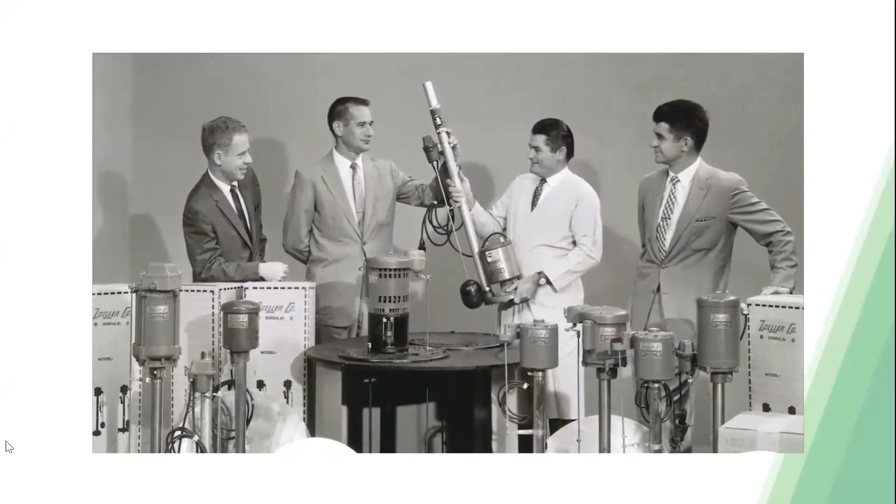During the beginning of the growth, the two arms of the company, manufacturing and sales, were managed by Pop's sons. In the 60s and 70s, the sales arm began to stretch its way across the country, expanding through strong relationships built face to face. Today, people around the world depend on the Zoeller family of companies and their products to move and treat water.

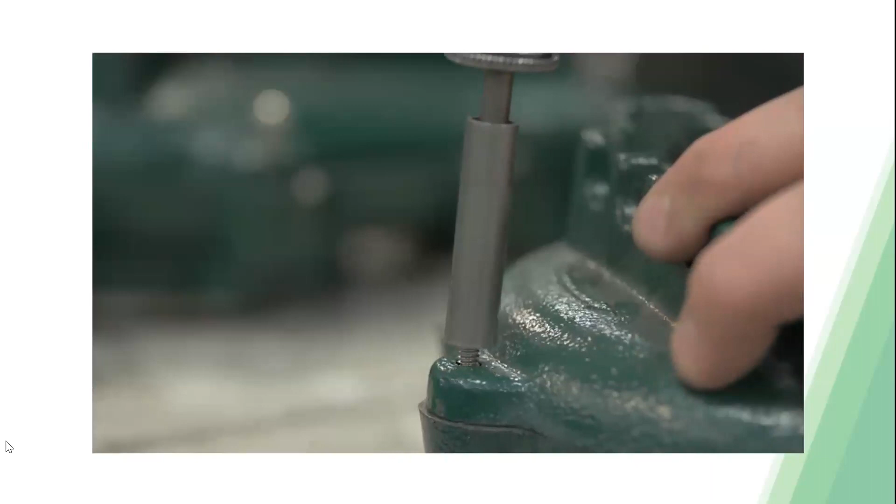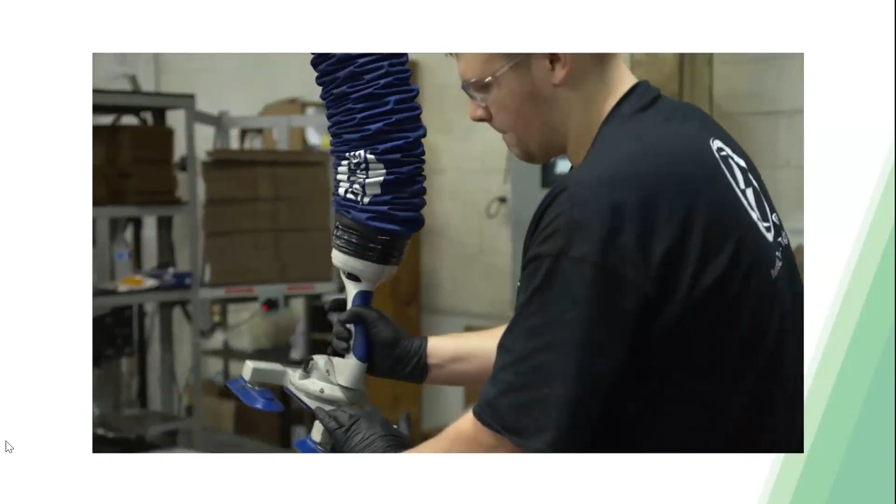But what is it that really sets a Zoeller pump apart from all the rest? Why choose Zoeller? The Zoeller brand is trusted. Zoeller is a family-owned company that has been an established name in the industry for almost 80 years. With a commitment to empower American workers across the country, not only is the Zoeller brand here to stay, but it has never left.

Devoted to the pursuit of excellence and continued improvement, Zoeller supports education and training for current generations involved in the plumbing industry and those to come, with their Center for Excellence training facility. Established in 2015, this hands-on training center is responsible for building and nurturing a reliable network of professionals to meet customer needs.

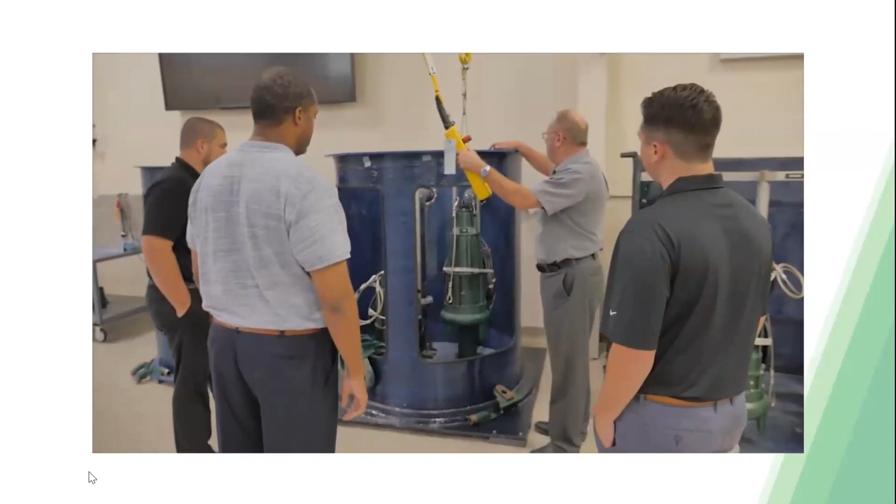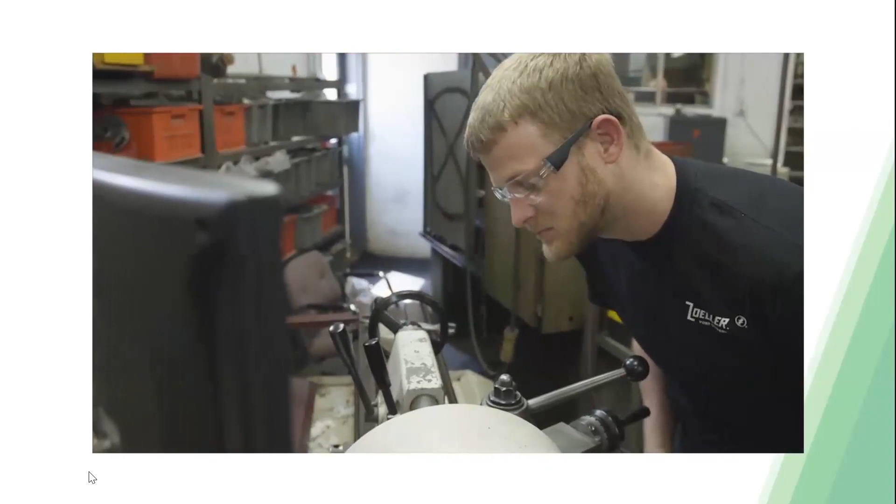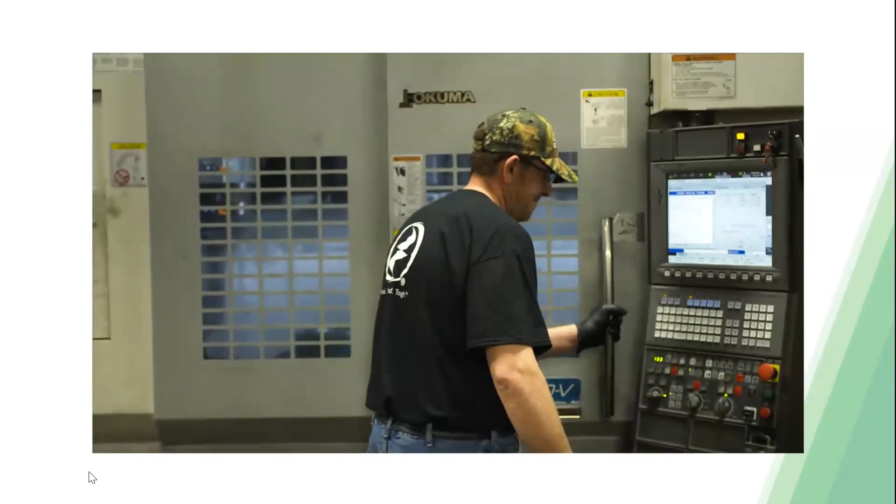All Zoeller products are thoroughly tested. Zoeller pumps are thoroughly tested throughout the manufacturing process, again and again, to ensure all pumps that leave the facility in Louisville, Kentucky can match their published performance before making their way to you. You should have confidence in knowing your Zoeller product will work as it should, when it should, whatever the application, without fuss or headache, to keep your home dry, protected, and operational.

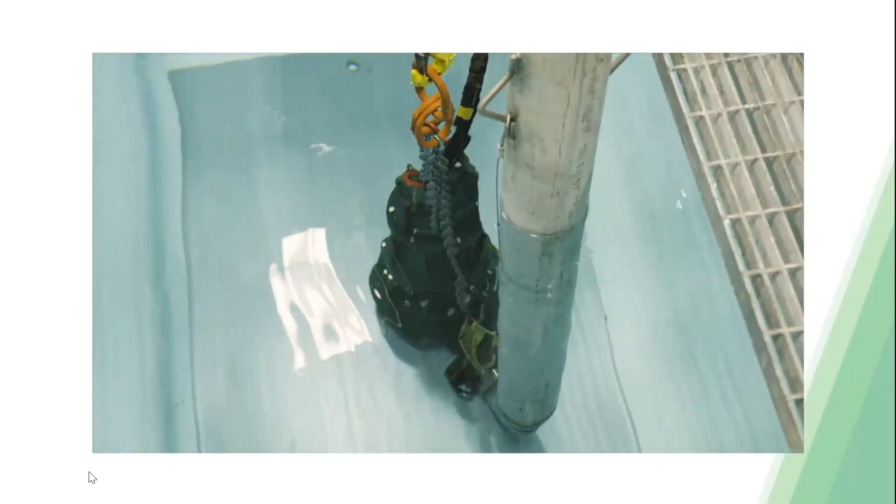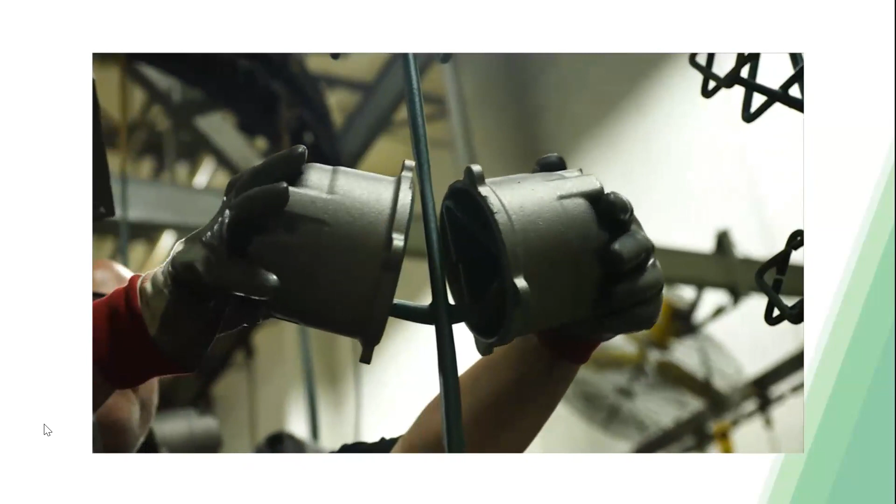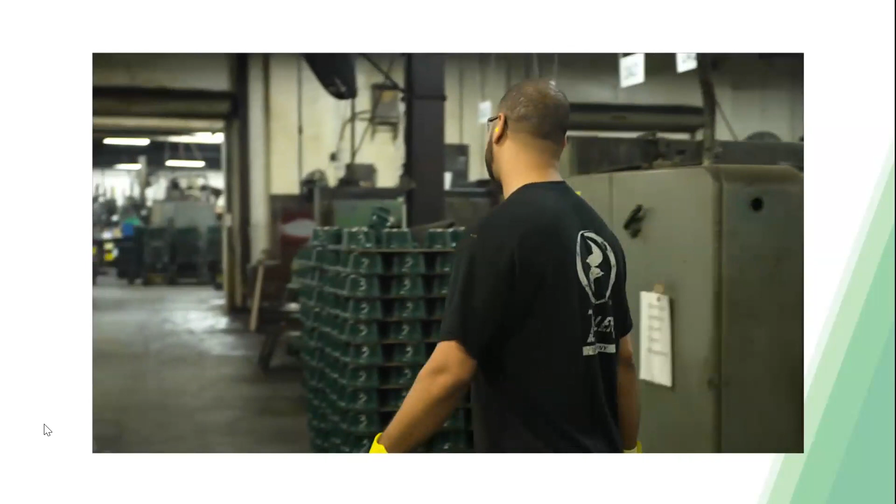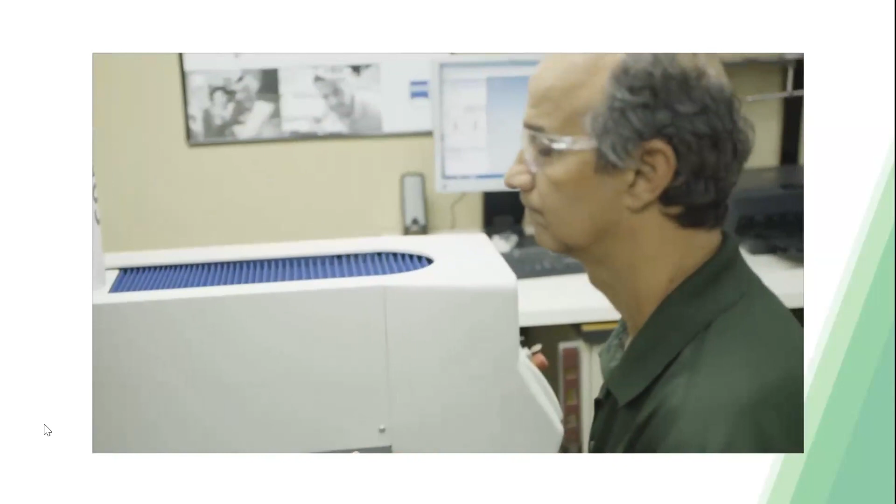Zoeller pumps are tough. These dependable pumps are constructed with heavy-duty cast iron and coated with a powdered epoxy finish to create the strongest and longest-lasting pump on the market. The reserve power design, combined with the industry-proven snap action switch, means your Zoeller pump won't quit when you need it the most. From humble beginnings to a brand known worldwide, Zoeller Company is proud of its dedication to its core values of quality, service, innovation, and integrity. Every product they make, every person they hire, and every relationship they develop is still built upon these standards.

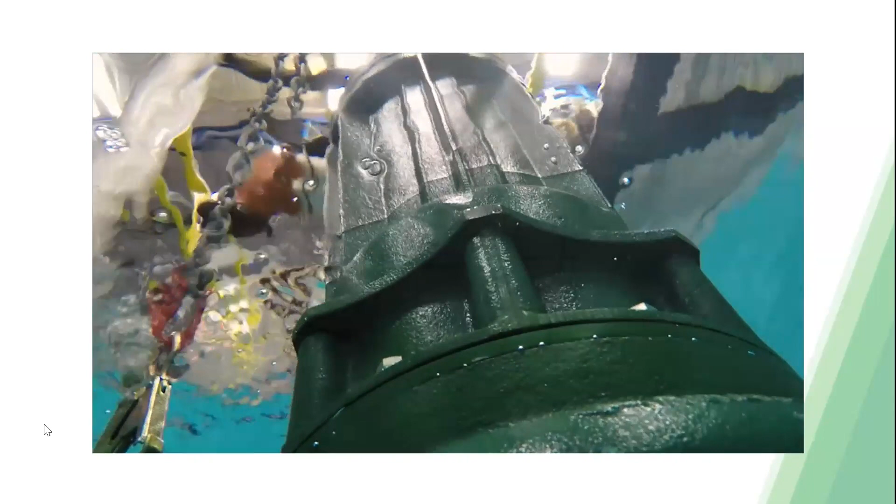So why choose Zoeller? Zoeller pumps are the pumps the pros use. You can't fake over 79 years of experience and expertise. If it doesn't say Zoeller, then it's not a Zoeller pump.

Zoeller Canada was established in 2007 as one of Zoeller's international sales offices. We're located in Brantford, Ontario, and we share a 135,000 square foot facility with Tulsar Controls, which is Zoeller's controls division.

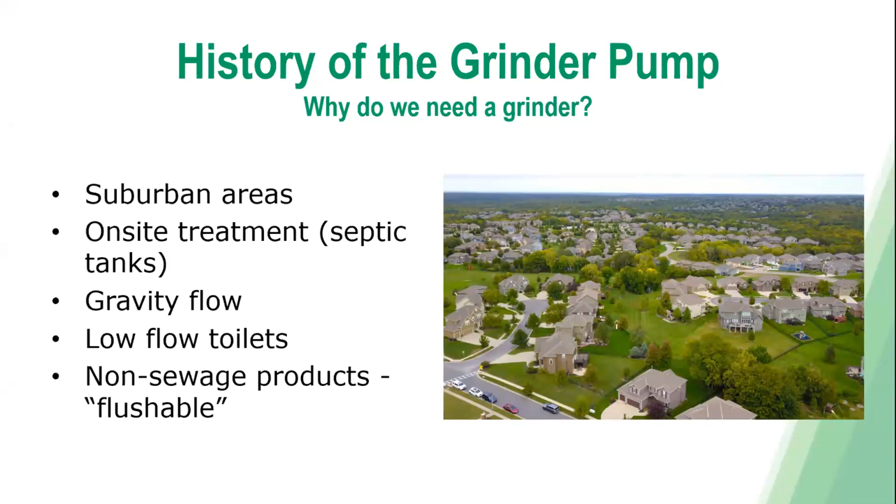I'm going to start off by sharing with you some of the history of grinder pumps. In the 60s and 70s, there was an increased expansion into suburban areas coupled with a need to move sewage further to treatment facilities. Suburban areas are less suitable for on-site treatment, septic tanks, and not all building sites suited for gravity flow. The introduction of low-flow toilets coupled with the same amount of solids and debris proved hard on standard sewage pumps. Also, there was an increased usage of flushable wipes and other non-sewage products being flushed down toilets.

Grinder pumps are designed to operate on small diameter piping, typically 1 1/4 to 3-inch discharge. They help eliminate some of the issues that sewage pumps may encounter. They are typically used in pressure sewer systems or systems with clogging problems. Grinders are not a solids handling pump. Grinders essentially are a 2-stage machine. First, they grind solids to smaller particles and then pump the wastewater to treatment facility or elsewhere. They have high pressure and head capabilities, but lower flows when compared to a standard sewage ejector.

Because of the cutting action and smaller solid size, the tolerance on your impeller can be tighter, which allows you to get that higher head. The reason you get lower flows is because the small opening size on the cutter plate restricts the amount of material that can enter into the pump housing. They're primarily meant for pumping sanitary sewage, and Zoeller is the only manufacturer of a double-sealed reversing grinder pump, and we'll cover some more of that further on in the presentation.

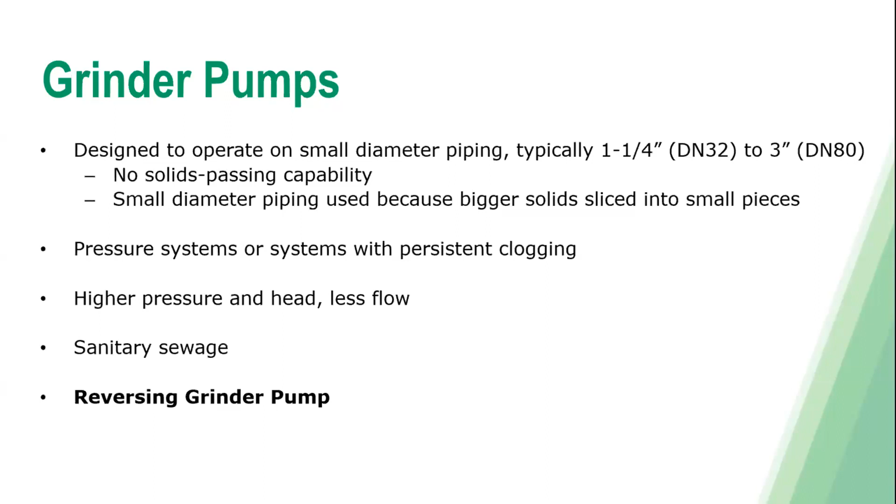All pumps are 100% factory tested before shipping, meaning that each pump before it leaves the facility is submerged in water and tested for its published performance curve before making its way to you. The grinder pump starts at 0.5 horsepower and goes up to 15 horsepower. The offering consists of standard and hazardous duty explosion-proof pumps, unidirectional and reversing. There are both single and double seal models available.

Here are a few standard characteristics of the grinder pumps shared among the series. All of our grinder pumps are constructed of cast iron with a corrosion-resistant powder coating epoxy finish and stainless steel hardware built for years of reliable service. The cutters are axially cutting with scissor-like capability, using a hardened stainless steel cutter and disc. Our grinder pumps use a vortex impeller after the solids are shredded into small pieces. They have an oil-filled, hermetically sealed motor with Class B insulation, automatic reset thermal overload protected, and their maximum operating temperature is 130 degrees Fahrenheit or 54 Celsius.

The cutters: we have the top cutter that is a single directional grinder. The best way to explain the operation of the grinder cutter is it kind of acts like a cheese grater without the rotation. With proven tri-slice cutter technology, we have 3 independent cutting channels that provide over 250,000 cuts per minute. The stainless steel cutter and plate have a 55-60C hardness. Essentially, with the cutter mechanism, it grinds the solids down to smaller particles of 1/4 inch or less, usually utilizing a scissor action and the cheese grater type plate with its small holes. The particles then get pushed to the vortex impeller and then pumped through the unit.

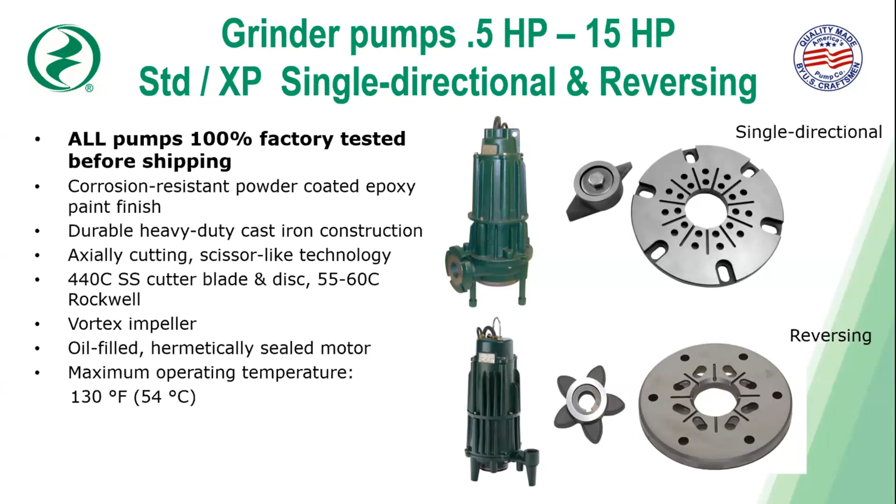The lower picture shows the reversing grinder with its cutter. The cutter can automatically alternate direction upon each new cycle to enhance blade life and free hangups. The 5-star cutter blade, along with the modified cutter plate, enable the pump to cut in both directions.

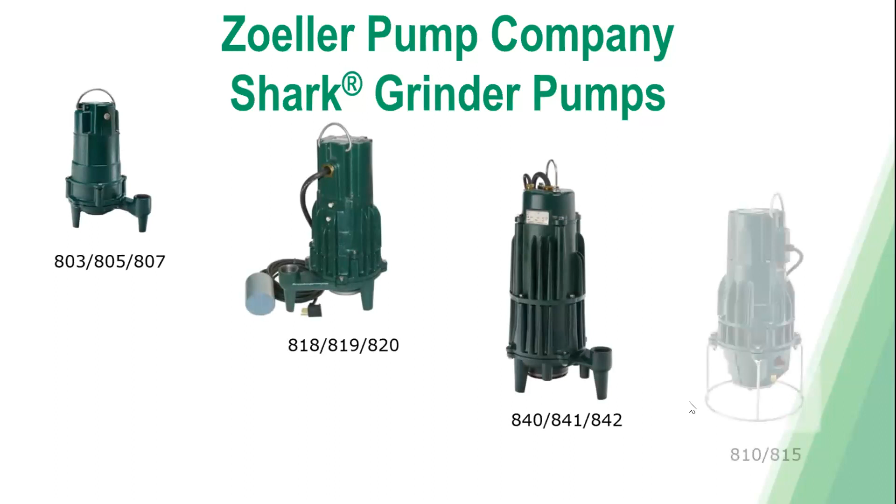Grinder pump models under the Zoeller brand offer units recommended for lighter residential and commercial applications up to 2 horsepower max. These include the 803, 805, 807 fractional horsepower series, the 818, 819, 820 series, the 841, 842, and 840 reversing grinder, and finally the 810 and 815 progressive cavity units.

These fractional horsepower grinders can handle an entire household of flushable materials. There are 3 sizes available: automatic and non-automatic, 115 volt or 230 volt single phase only at 3450 RPM. Half horsepower model 803, 3/4 horsepower model 805, and then the 1 horsepower model, which is the 807.

These units have auto reset thermal overload protection, internal capacitor and start relay, carbon ceramic single mechanical seal design, and a 1 1/4 inch vertical discharge.

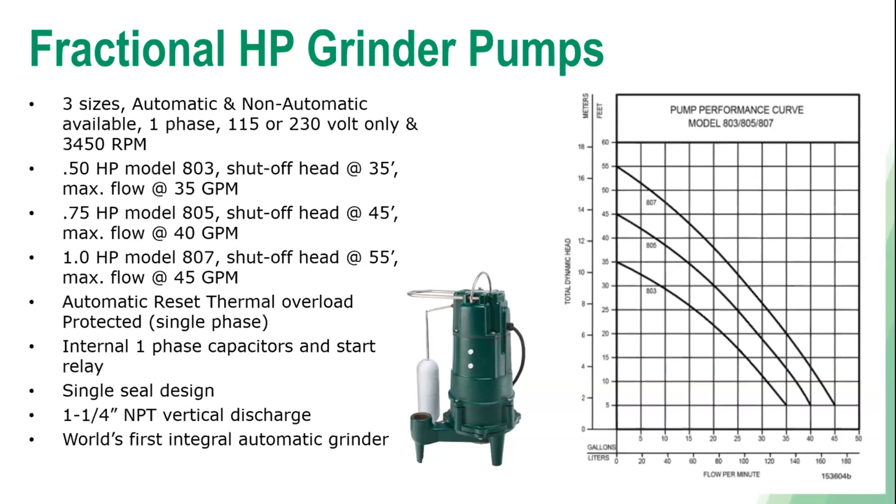Zoeller has the first integral automatic grinder, used in the 915 systems, package complete and job ready, great for fast installations, indoor or outdoor applications. 915 package systems come in 2 different sizes: 18 by 30 fiberglass or poly, 24 by 24 in poly only, with high water alarm and 1 1/4 inch check valve with union.

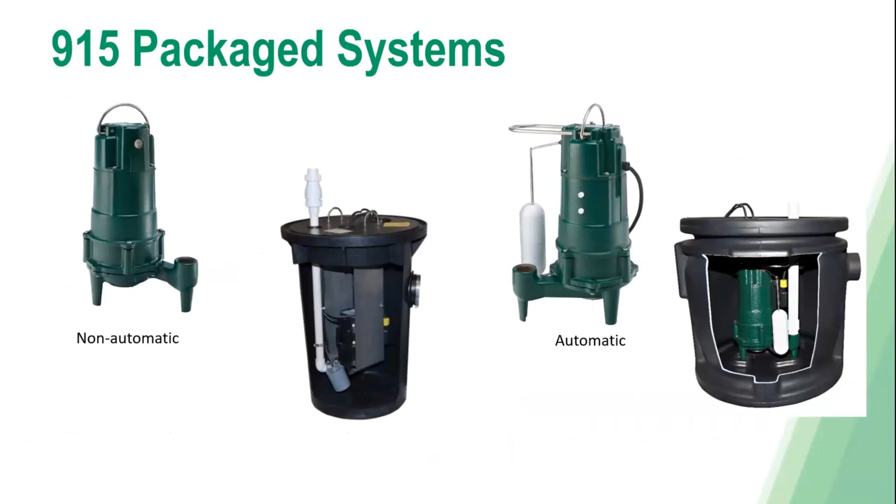And if I can just pause you there. Yeah, I know one thing that's come up frequently over the years working with Zoeller here, is that those 915 series is certainly a model number to keep in mind for anyone on the call. For any of your retrofit applications, those have been lifesavers. Those challenges you get into during a design where you're stuck in a basement and you've got to send something up, if it's not designed around it, these fit into such a small footprint that they've been really lifesavers for a number of projects. So a good model to keep in mind there.

This Shark 818, 819, and 820 series of grinders are engineered for heavier residential applications and pressure sewer systems. Model 818 is 1 horsepower, 819 is 1.5, and 820 is 2 horsepower. Not automatic or automatic models with integral control available.

Both durable, heavy-duty, thin cast iron construction and thermally protected oil-filled motor allow the pump to run cooler. Upper and lower ball bearings, stainless steel cutter blade and plate, stainless steel shaft with stainless steel hardware, 20-foot power cord, extra lengths are also available.

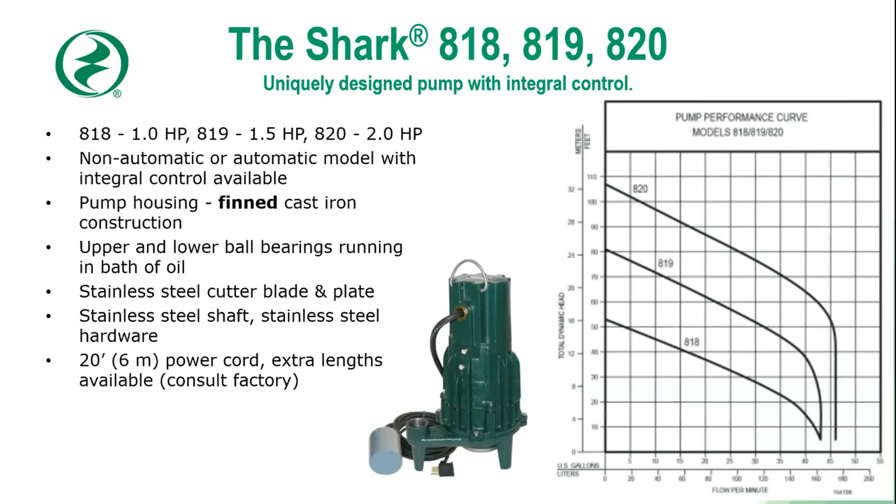Zoeller offers the industry's only automatic reversing impeller and cutter assembly, which virtually doubles the service life of ordinary grinder pumps. Every time the pump operates, it will reverse direction. The panel shall incorporate the automatic reversing function, which enables the cutter blades and impeller to rotate in either the clockwise or counterclockwise direction.

With each duty cycle, the cutters will rotate in the opposite direction from the previous operational cycle. So just a quick question there, because it's come up many times over the years as we introduced that Shark 840. If you want to go back to that last slide really quickly, could you explain why the reversing grinder matters? Like, the statement's always, if the plan is for the grinder to chew up the material, why does it matter if it reverses?

Right, so lots of times you'll see it actually on our YouTube channel as well. Let's say if there's jeans going into it, it'll grind in one direction, and chances are that jeans will not go through on that single direction. So then it'll reverse it, and instead of getting jammed, it reverses it and can cut through the rest of the jeans. That's one thing. Now the other thing is also for longer life, so if you have wipes and stuff going into it, it'll go in two different directions. So you're increasing the lifespan as well. Great, thank you.

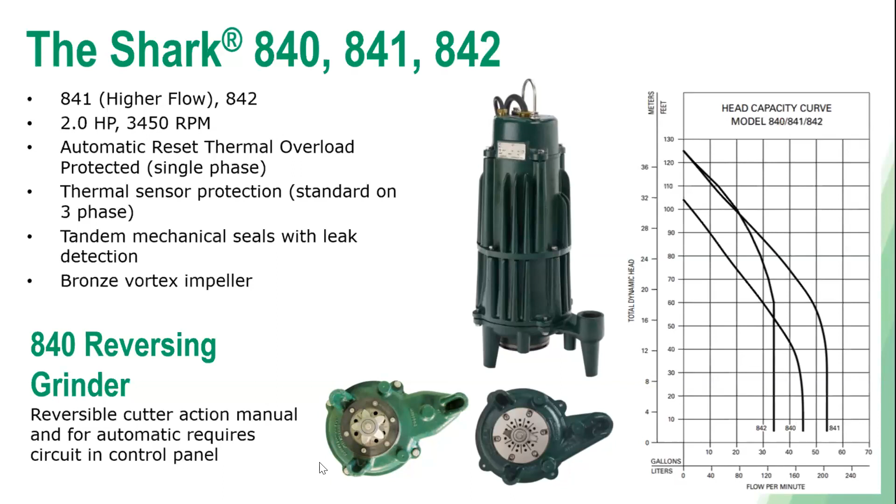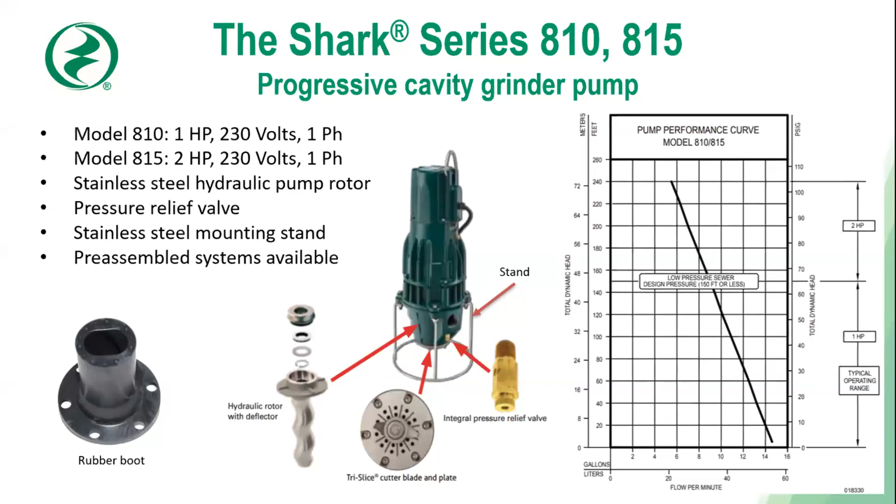The model 810 is a 1 horsepower, 230 volt unit. The 815 is a 2 horsepower, 230 volt, both in single phase. Features include a stainless steel hydraulic pump rotor, pressure relief valve, stainless steel mounting stand for freestanding installation, and pre-assembled systems are also available.

Grinder pump models under the ZEP brand are engineered for heavy-duty wastewater applications with a number of options: upgraded mechanical seals and elastomers, moisture and temperature sensors, horizontal flange and impeller trims.

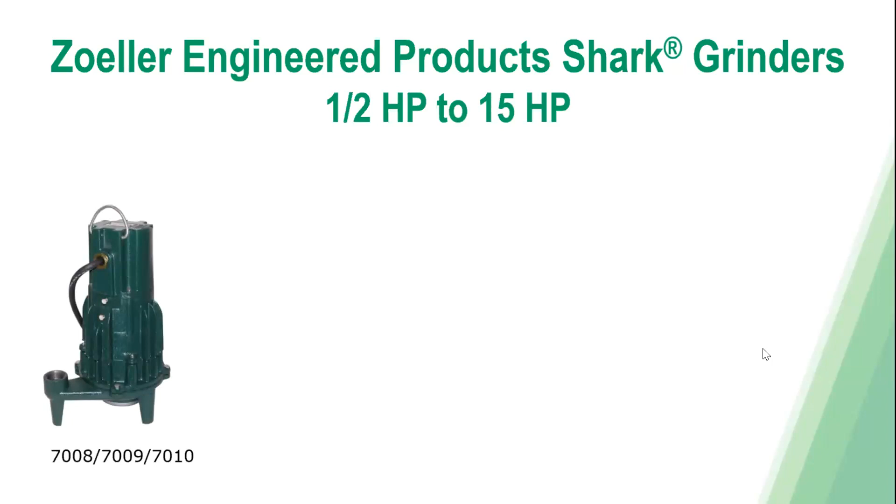Models include the 7008, 7009, and 7010; 7011, 7012, and 7013; 7110, 7111, and 7112; and finally the 7020 and 7021 progressive cavity units. These units have similar characteristics and performance to the Zoeller pump brand 818, 819, and 820.

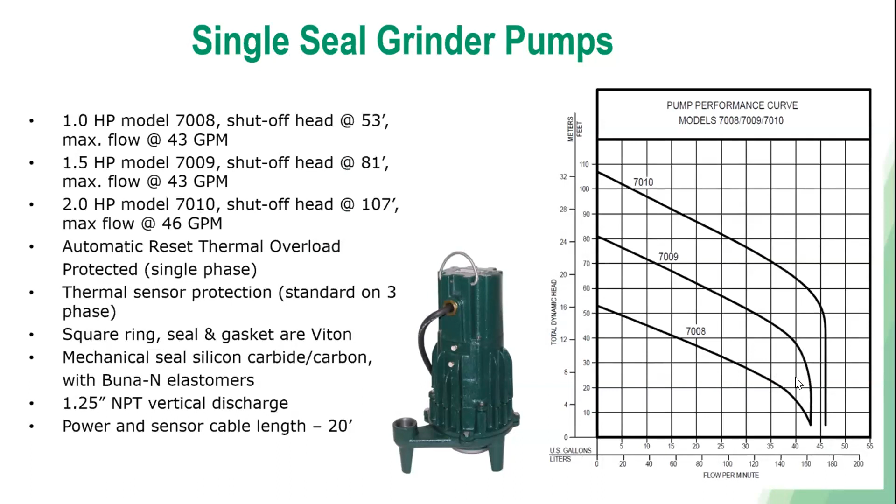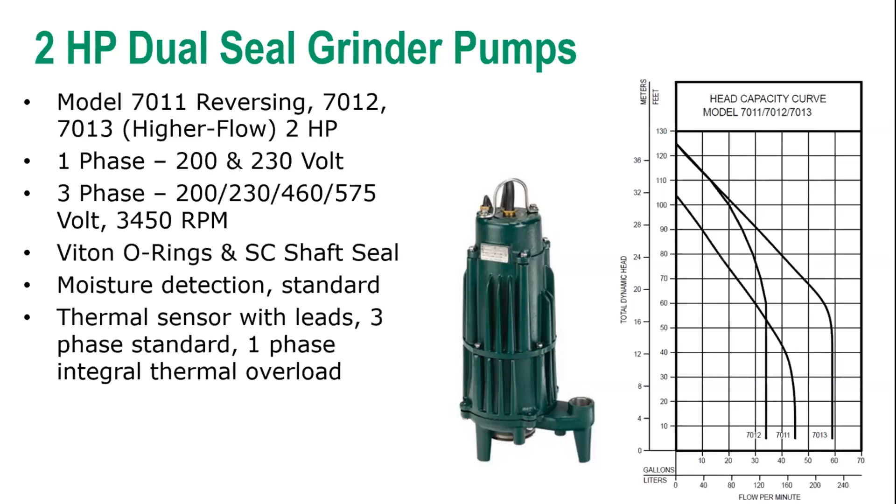3-phase, 200, 230, 460, 575 volt, 3450 RPM, Viton O-rings and silicon carbide shaft seal, moisture detection standard, thermal sensor with leads for 3-phase, and standard single-phase integral thermal overload.

Now we're going into bigger units, higher head applications and higher flow, 30 different variations, standard and hazardous duty. Applications where these pumps will be suited for are sewage lift stations, housing developments, essentially municipal projects, large commercial projects, and low pressure sewer systems that have high vertical lift or long force mains.

Pump characteristics: 2-inch NPT, 2.5 and 3-inch flange discharge, high head, high flow and reversing capabilities. Single phase 230 volt in the 3 and 5 horsepower only, 3-phase 200, 230, 460 and 575 volt, 3450 RPM. Thermal sensor and moisture sensor with leads, ball bearings, upper and lower carbon chromium steel bearings. Power sensor cable is 25 feet.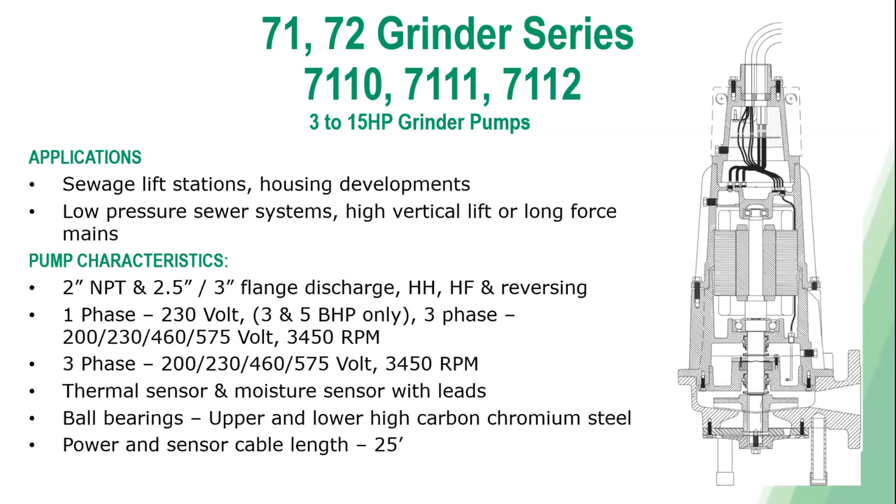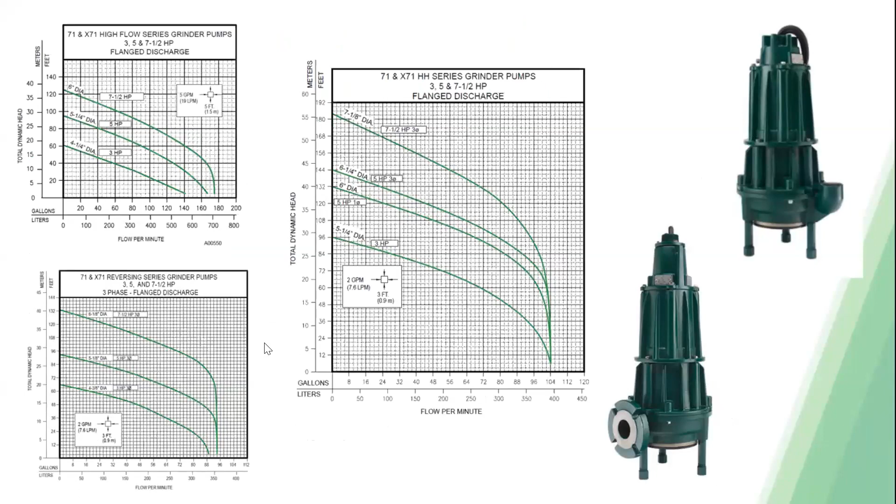As you can see here, the 71 series grinder pump has a max shutoff head of 183 feet. This is the capability of these units based on the higher horsepower and larger discharge. You'll also notice that in this 71 series, you can go from 3 horsepower to 7.5 horsepower as far as the reversing grinder goes.

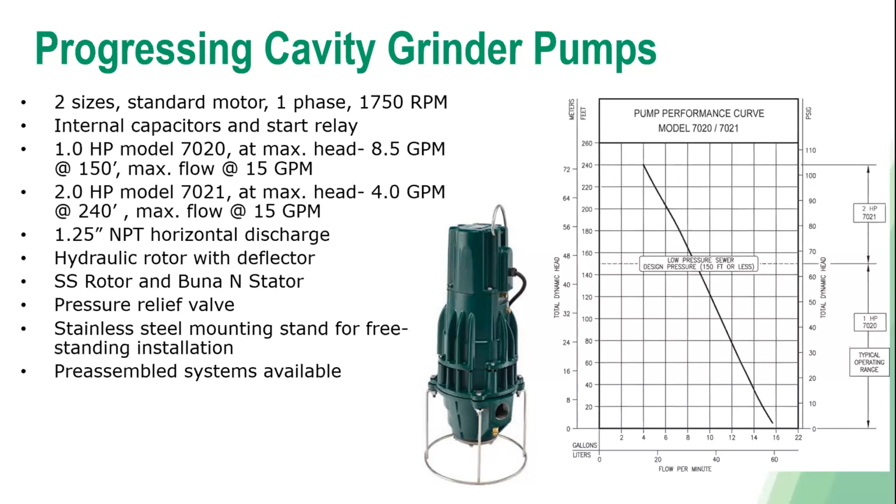Applications include sanitary sewage pumping stations, pressure sewer systems, housing developments, hospitals, larger private developments, and commercial projects. Two sizes, standard motor, single phase, 1750 RPM, internal capacitors and start relay: 1 horsepower model 7020, 2 horsepower 7021. 1.25 NPT horizontal discharge, hydraulic rotor with deflector, stainless steel rotor, Buna N stator, pressure relief valve, stainless steel mounting stands for freestanding installations, and pre-assembled systems also available.

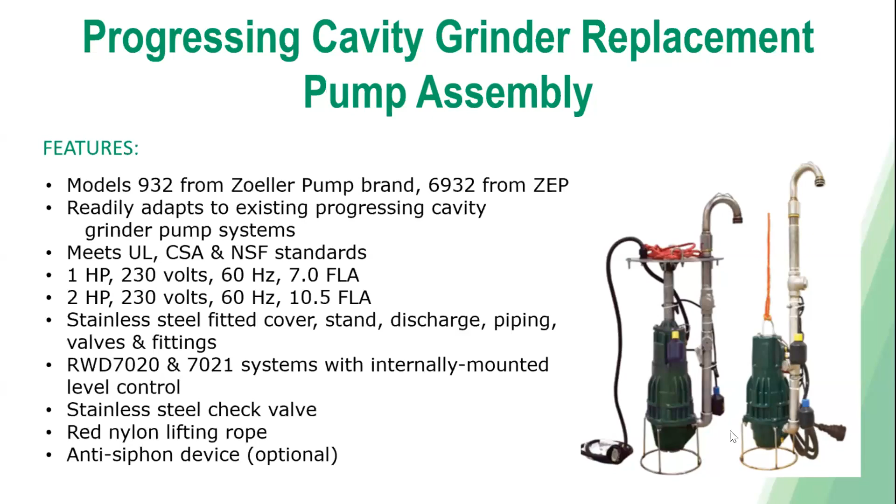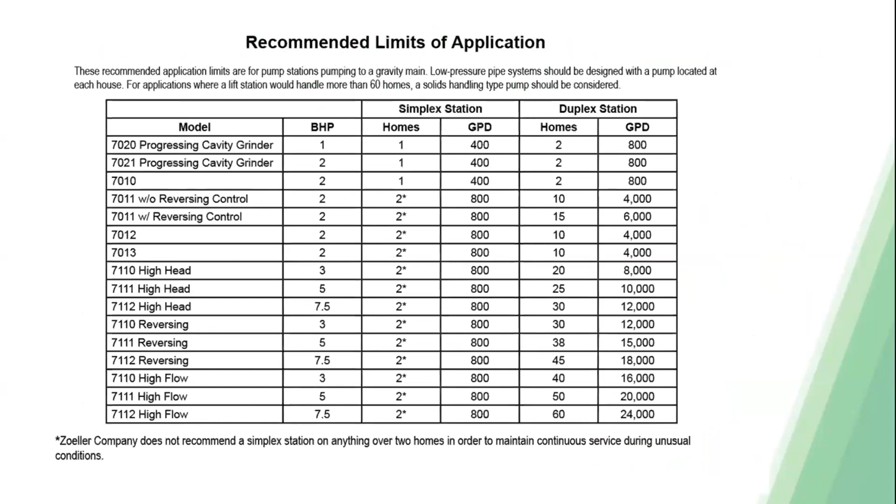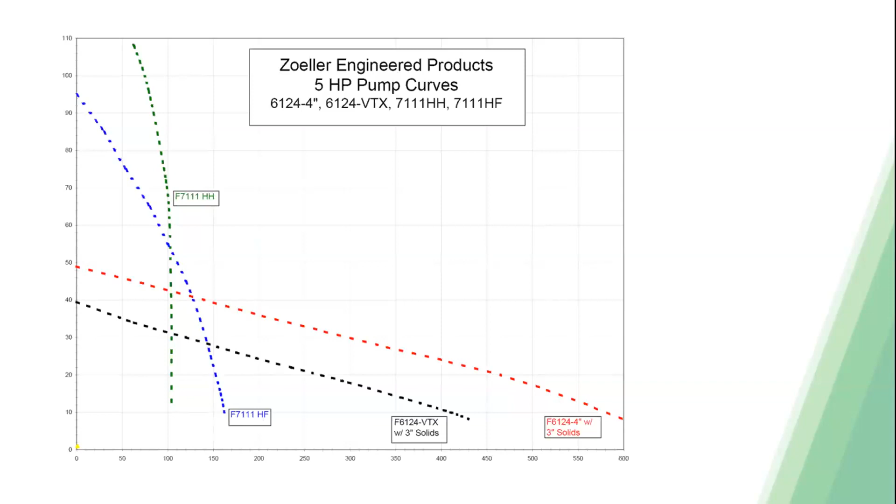Here we have some curves showing the difference between the 7111 high head grinders with low flow to the 6124 solids handling pumps that can offer greater flow. It's a matter of understanding the system requirement and putting the right pump in the right application.

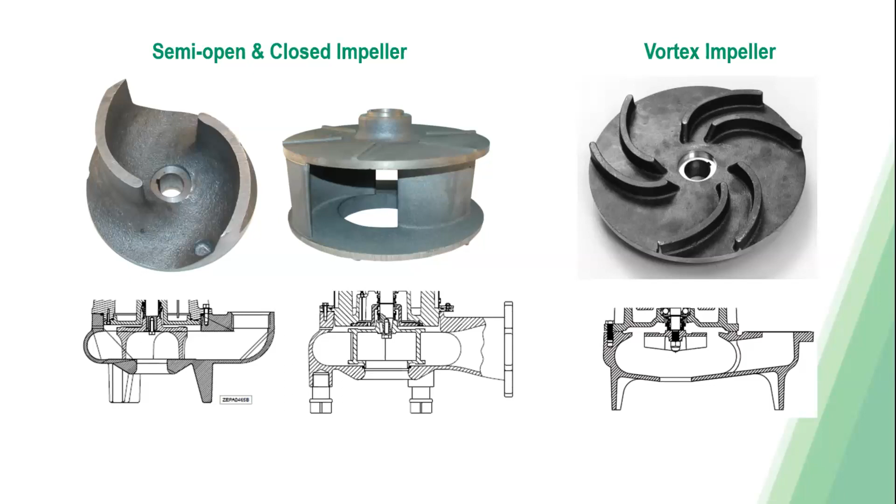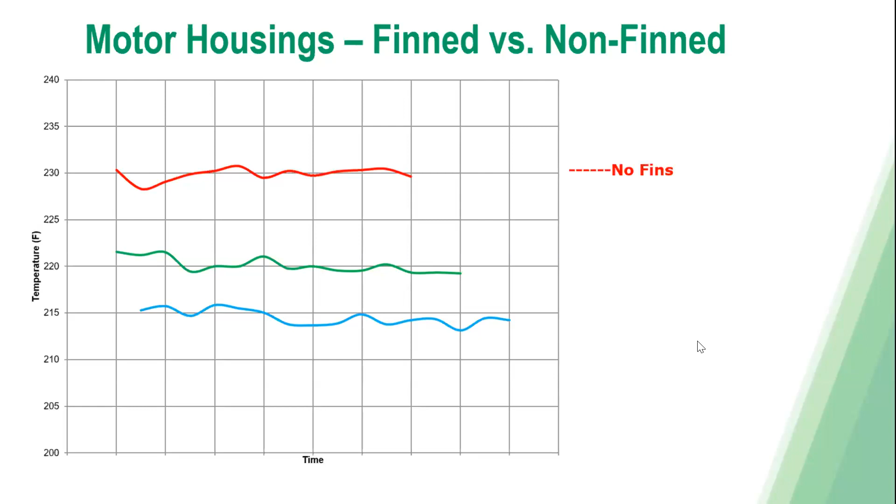A hazardous duty or explosion-proof rated pump has a specially enclosed motor. Should vapor or gas explode inside the motor, the frame of the motor will not be affected. The enclosure is constructed so that no such explosion will ignite vapors outside the motor.

Zoeller explosion-proof pumps are cCSAus approved, Class 1, Division 1, Group C and D. The Zoeller pump brand of explosion-proof pumps is only available in the 840, 841, and 842 series, while the ZEP brand starts from the 7011 series up.

Applications include garages, storm sumps, municipal sewage, leachate, elevators, government projects, offices, healthcare, airports, petroleum facilities, train and auto applications, and grain elevators.

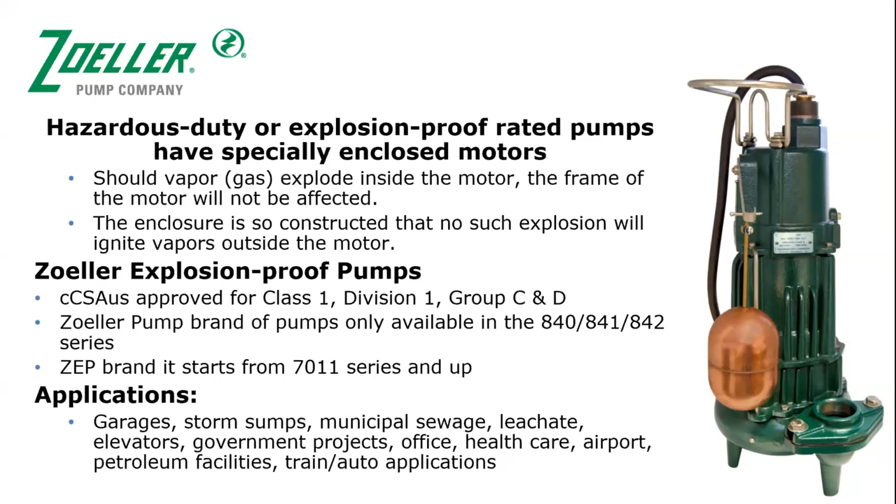After figuring out which pump you need for your application, you now have to choose how you are going to control it. If it's not just a standard pump with an integral float switch or a piggyback float switch, you have to consider control panels, simplex with 3 floats or duplex with 4 floats.

The pump assembly can be easily lowered into position without disturbing the piping by using a Z-rail disconnect system, which assists in removal of the pump out of the concrete, fiberglass, or steel pit.

Then you consider accessories like check valves, cast iron, PVC, plug valves with handles, etc. Lastly, you might require an external high water alarm, or if you have an integral float switch or are using a piggyback float, the high water alarm is a great option.

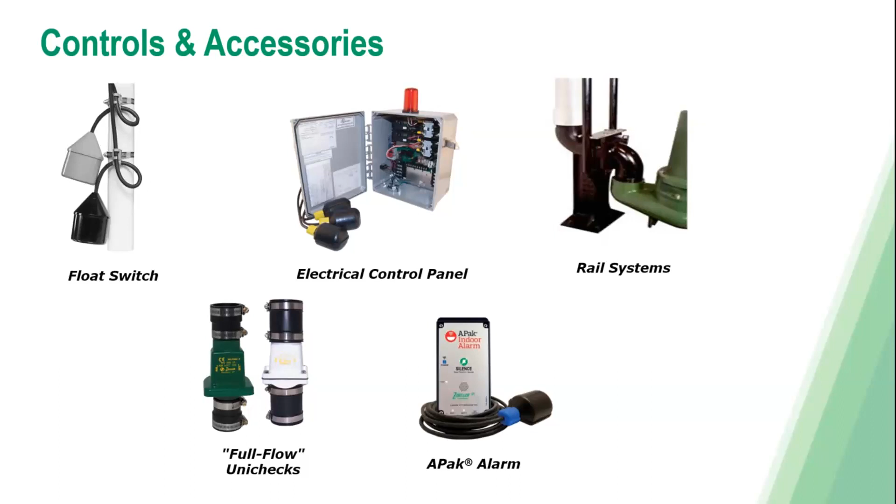Complete grinder package systems are factory assembled for quicker, easier installation at the job site. We can also provide unassembled systems, where pumps and accessories come as separate items, with less piping.

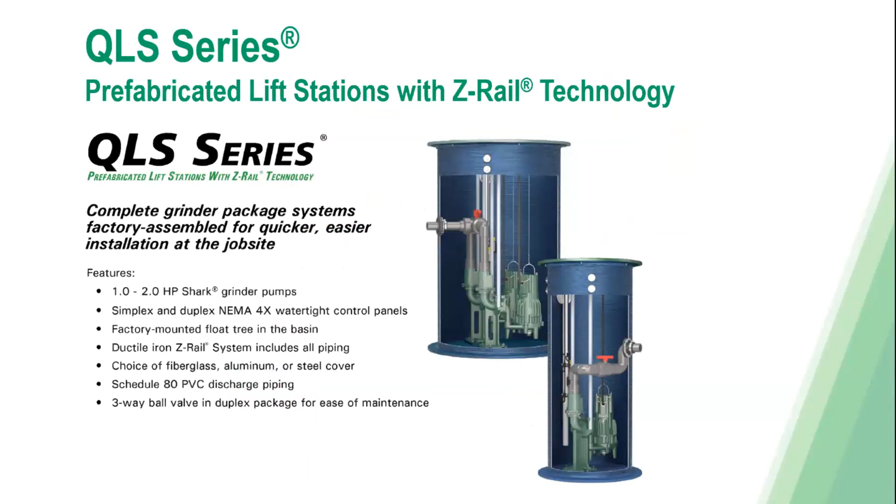This is now the inside of the fiberglass pit, where on the left side you have the pump on top of the Z-rail assembly, and on the right you have a vault system, with only the valves inside.

Let me jump in here quickly and discuss the Qwik Jon system. Houses are no longer just a home; they have evolved into gyms, schools, entertainment spaces, and office space. So Zoeller came up with a way to redesign your living space and add a bathroom anywhere you choose using the Qwik Jon. It provides functionality without the mess of digging and costly installation, a good option for the home and wallet. So you have the Qwik Jon Premier and the Qwik Jon Choice.

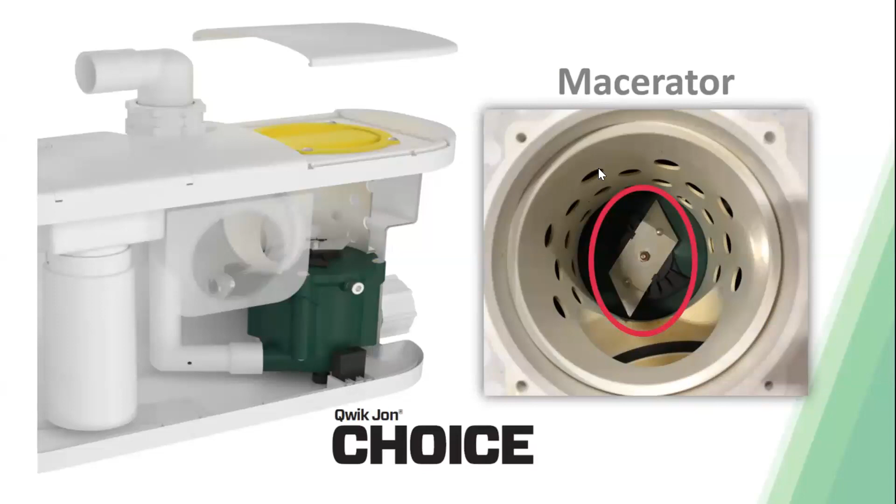The Qwik Jon Choice has a macerator in it, while the Qwik Jon Premier comes with a grinder. The Qwik Jon Choice comes with a 1/3 horsepower macerator pump and is made for residential use with toilet paper and organic waste only, while the Premier has a 1/2 horsepower grinder pump and is made for use with toilet paper, organic waste, and sanitary items.

Standard toilets drain to piping in the floor, so be sure to buy the right one with the spigot drain at the back of the toilet. We carry both toilet and tank, making the set a EPA WaterSense compliant toilet with 1.28 gallons per flush.

Zoeller has several videos out there showing the grinder in action, taking care of a few different household products. In these videos, you can clearly see the grinder wants to pass the product through its cutters, not deflect it. It truly acts like a shark in a feeding frenzy, grinding up all the products that come into its path and shredding them into small particles. You can check out these videos on Zoeller's YouTube channel.

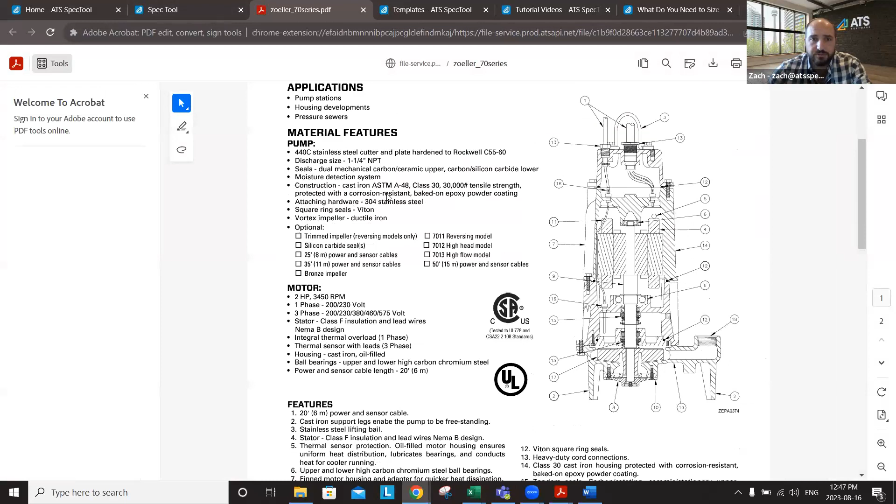I can hit the spec sheet button and get the base model. But if I want to configure it, we'll go with the standard vortex impeller and standard ductile iron. You can see the voltage is already selected because I filtered by that already. We'll go with a standard silicon carbide and an upgraded silicon carbide for the upper shaft seal, since we don't want any water getting in. Then we can hit add product.

Once it's configured, the add product button becomes available. Then, as there are any other products that need to be selected to go along with this, it will recommend those as well. So with a water heater, you need an expansion tank. With a toilet, if it's a wall hung flush valve toilet, you need a flush valve. Here we've got everything we need.

We are good to go. We can hit add to drawing, and that would take us back to add an additional fixture, or I could have hit complete, and that would take me back to my project page.

Here you can edit the drawing label. We could call this SP grinder option 3. I can change the sequence. If I want this to show up before the previous one, I can do so, and add in any additional notes I need.

From there, all you need to do is, again, check this box to select all, or if we don't want the solids handling one to print out, we can deselect that. We'll hit download, and then you can download in any one of the formats you choose—the ATS submittal, a fixture schedule or pump schedule in Excel, various written specs both long and short form, the manufacturer spec sheet, the Revit files, a 3-part spec, lots of different options. It's one of the few places where you can multi-select and download a variety of formats.

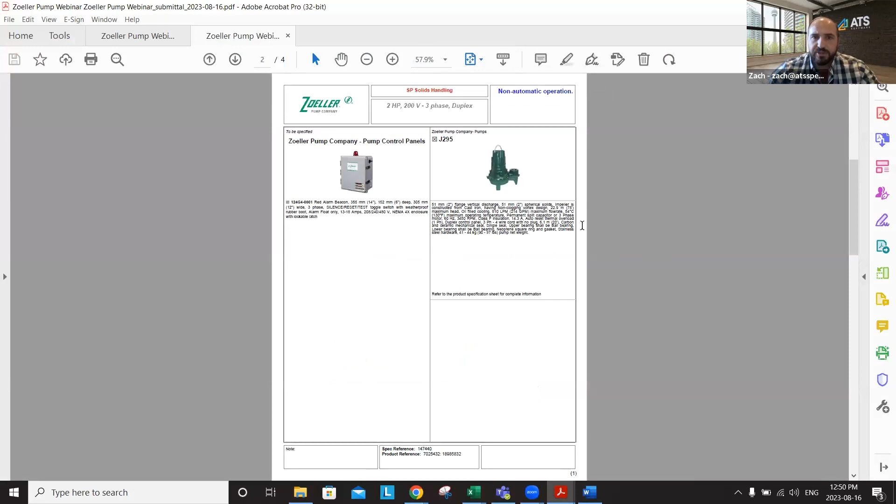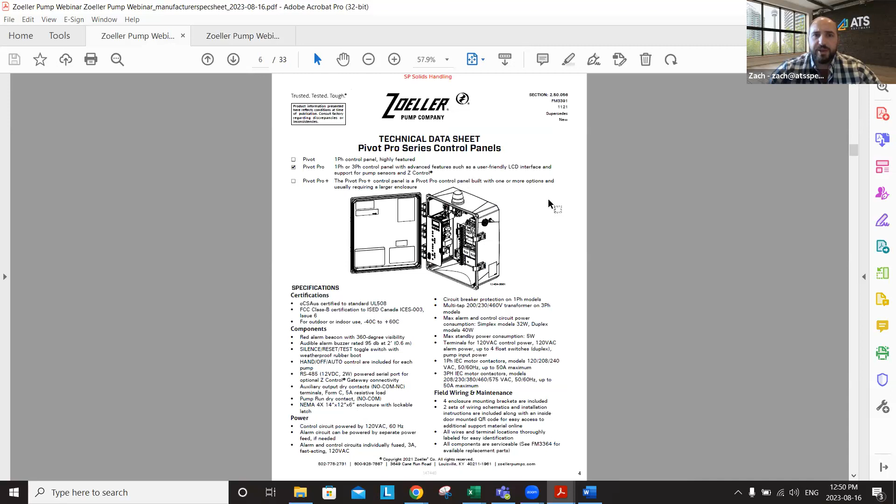And then, of course, the manufacturer spec sheets that I mentioned as well—all these are integrated into the system. So you get a nice handy table of contents, the products that you selected, and the manufacturer spec sheets for all the products. So a little bit more detailed on this package, but nice that you can access all those different pieces of information all in one place just by hitting this download all files button.

Now, let's say that you wish to round out the rest of the selection. Sump pump is unlikely to be a pump on its own—there may be more included in the scope of your project. That's where either your internal masters come in, so masters would be your firm's masters, the products that you use regularly.

I just had an engineer reach out to me looking to update—they do a number of bank projects. So I take their bank system and build a master for them that they can then just copy and paste. They'll stay constantly up to date. And then all they have to do the next time they have a project is go to the action and copy it from the master into a new project.

Similarly here, let's say the rest of this project—we'll look at a drainage master just to round it out. We could go into our drainage where, you know, something's got to be feeding the sump pump. So we've got an area drain, maybe a funnel floor drain as well, and we'll go with a parking drain. All of these may be feeding into that sump pump that we discussed. So I can search by project.